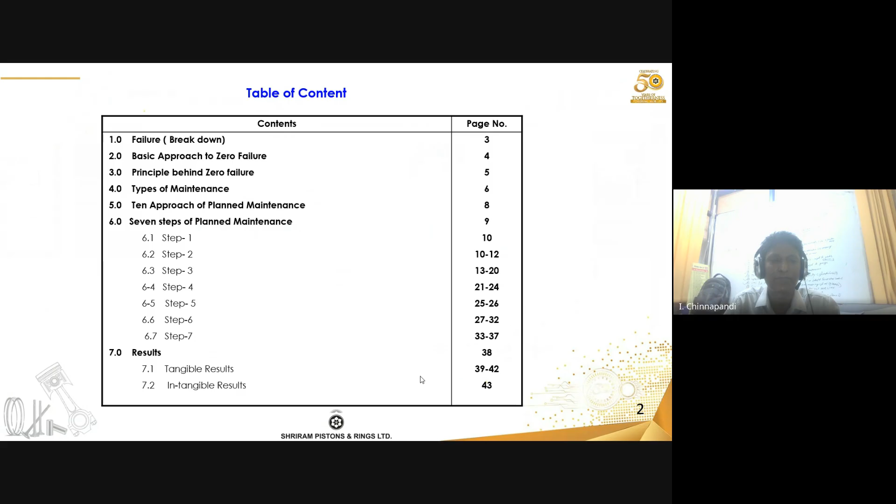Next. So this is what is failure. This definition is taken from the TPM. The TPM is a concept. It is designed and developed by JIPM.

It's called Japan Institute of Plant Maintenance. It's an institution in Japan. They define some principles and methods for maintenance, and they promoted all across the world. In India, most of the auto component manufacturing companies generally adopt these principles for TPM.

In South, in our state, we can say that there are many TVS companies. They got TPM like TVS Fasteners and many TVS Group, TVS Brakes India, and the industries, cement industries. So they adopt this methodology to improve, to reduce the breakdown and to improve their performance of the maintenance team.

The definition says failure is defined in Japanese Industrial Standard, JIS, as being any one of the following changes to the machine. One is losing any of its specified function. In simple language, if something is not performing, then becoming unable to achieve its specified performance. The machine is performing, but the rate of production is less.

For example, if you want to produce some component of these things. If we want to produce at a rate, for example per shift, if you want to produce some 5,000 components, we are manufacturing, but we are able to manufacture only 4,000 components, so we can say that the feed rate is less. And third point is becoming unable to produce products of a specified quality.

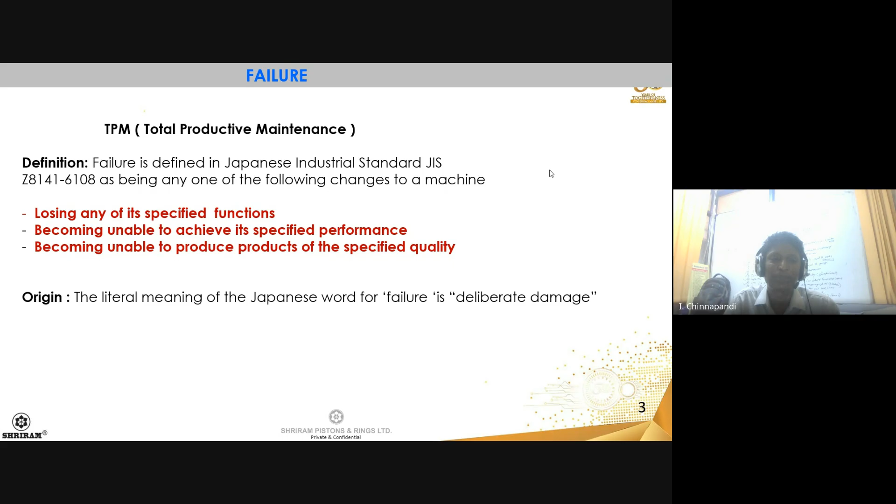The basic approach to zero failure.

Now manufacturing industries, especially the automobile industry, have to continuously operate machines 24/7, because in manufacturing and assembly lines, if it is a totally automated line, they will not stop for the equipment. It has to continuously run. So to continuously run that, what systems do we have to put in place so the equipment is in good condition and gives optimum performance?

The basic approach is equipment does not go wrong by itself. People made it go wrong, as we discussed earlier. By changing the way people think and act, equipment can be made completely failure free.

So it's a mindset. I have attended many trainings in Japan in different forms, and also at CII in India, Confederation of Indian Industry. They say we have to follow the system. If something is written, something has to be done, we have to follow that. That is all about maintenance. There is no shortcut, nothing more, nothing less. Just follow the systems and procedures.

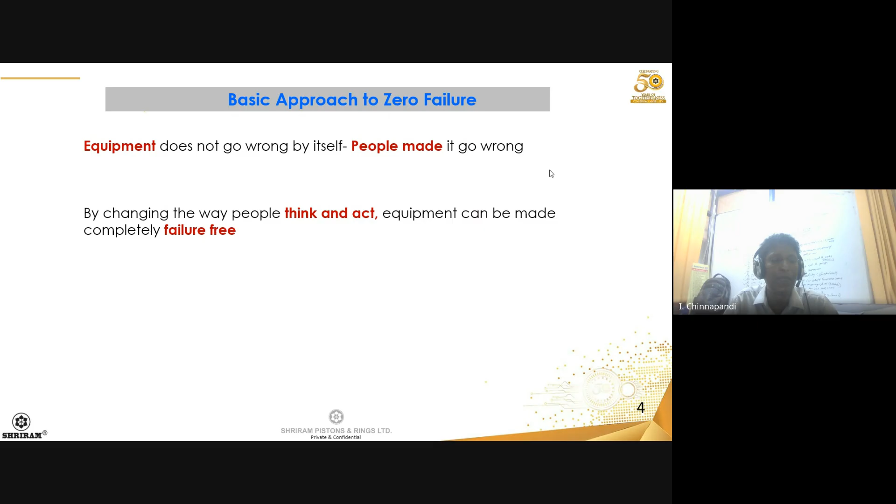Zero failure is all about the mindset. If we want to achieve it, yes, we can. Generally how we approach equipment is thinking one day it will fail - that kind of mindset we adopt generally. But we have to change the mindset. We have to believe that definitely we can achieve zero failure.

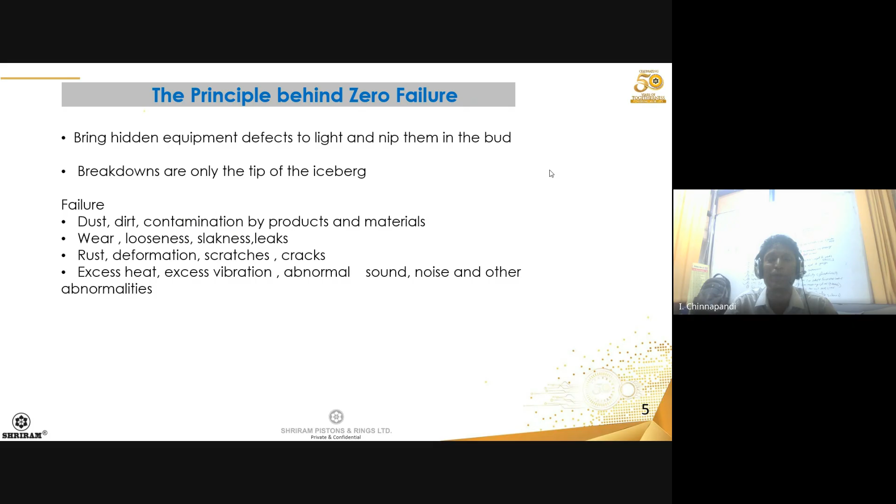So these are the types of maintenance. Maintenance starts with breakdown maintenance, corrective maintenance, preventive maintenance, predictive maintenance, condition-based maintenance, time-based maintenance, and maintenance prevention.

In the earlier age, in the 1960s or 50s, they used to do breakdown maintenance - whatever breakdown comes, they immediately fix it. Then it moved from breakdown maintenance to corrective maintenance. If a breakdown occurs, they fix it, then do some correction so it should not happen again.

Then it moved to preventive maintenance. Preventive maintenance means they made a schedule - yearly, monthly, quarterly. These are the checkpoints we have to do, these are the spare parts we have to replace. This maintenance is called preventive maintenance.

Then from that, they moved to predictive maintenance - that is the subject we are touching today. Predictive maintenance, the word itself says we predict something before it fails. It gives an indication something abnormal is happening, so at that time itself we can take some action. That is predictive maintenance, what we are discussing today.

And from predictive maintenance, we move to condition-based maintenance. Condition-based maintenance means we just see the condition of the equipment, take feedback of the condition, and accordingly do some correction. That's called condition-based maintenance.

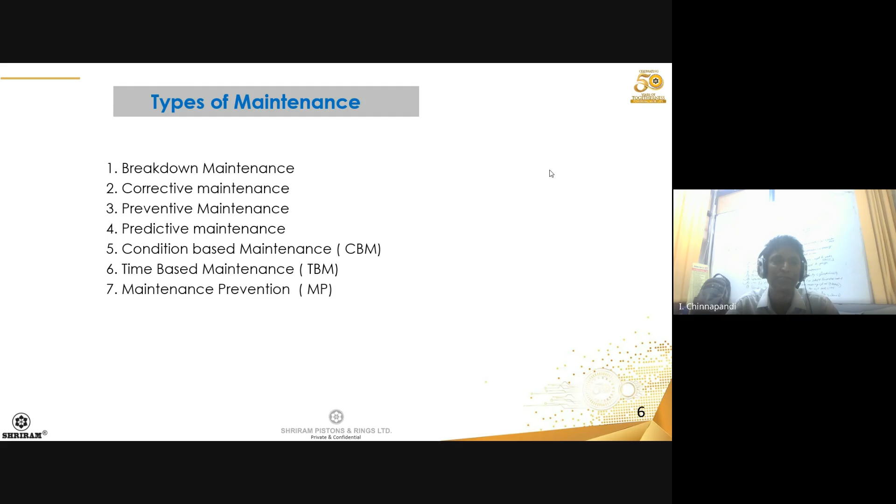So this is the basic role division. It means when there is a manufacturing team producing and operating the machine, and a maintenance team maintaining the machine, we have to define the role - what points the maintenance team will take care of, and what points the manufacturing team will take care of. This is the role definition basically.

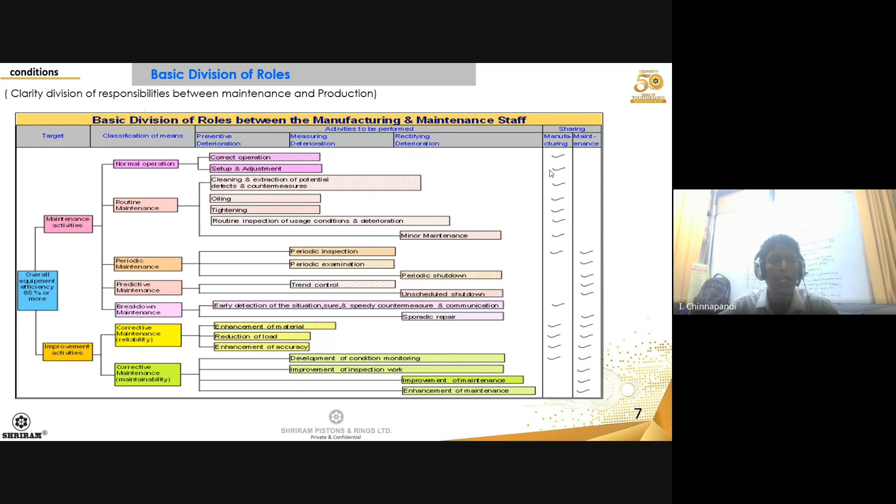Accordingly, the operating maintenance in-charge gives the check sheet to the production in-charge. These are the points they have to check in everyday operation, and they have to give feedback to the maintenance team. Next.

So this is the main crux of this content, whatever we are discussing - how a plant, an industry can go zero breakdown. This is the methodology which is defined and developed by Japan Institute of Plant Maintenance, in the name of TPM, that's called Total Productive Maintenance. This is a 10 approach of planned maintenance.

This 10 approach shows how we can increase the availability by increasing MTBF. MTBF means mean time between failure. For example, if equipment fails today, it can fail after 1 month also, after 6 months also, after 1 year also. So there is a mean time between failure.

And the other one is reduce MTTR. MTTR means mean time to repair. For example, in a shop floor, we are having 6,000 machines. There are 500 breakdowns, and it took 1,000 hours. So 1,000 divided by 500 is 2. So it means mean time to repair one breakdown is 2 hours. So this is how we can achieve that.

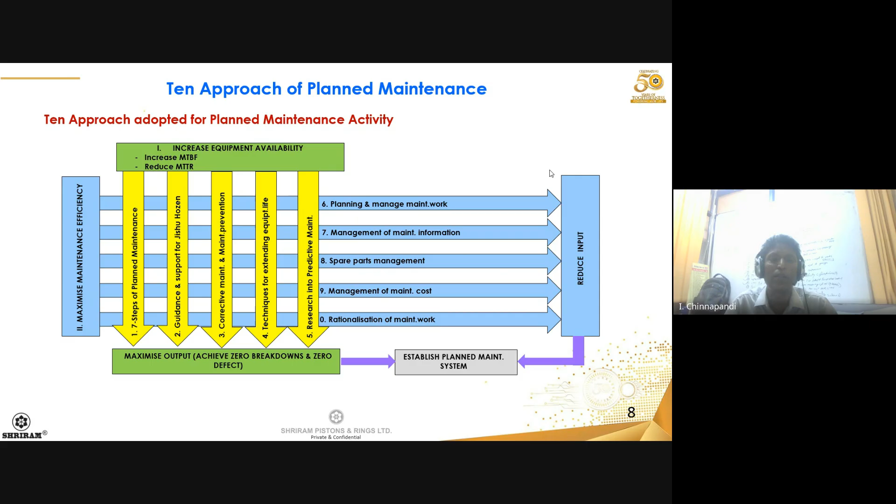These are the 5 things we have to do first. One is the 7 step of planned maintenance, then guidance and support for Jishu Hozen, then corrective maintenance and maintenance prevention, then different techniques adapted. Then the second point is maximize maintenance efficiency. For that also, these are the actions. So when you put together all these 10 actions, we can achieve a plant as a zero breakdown plant.

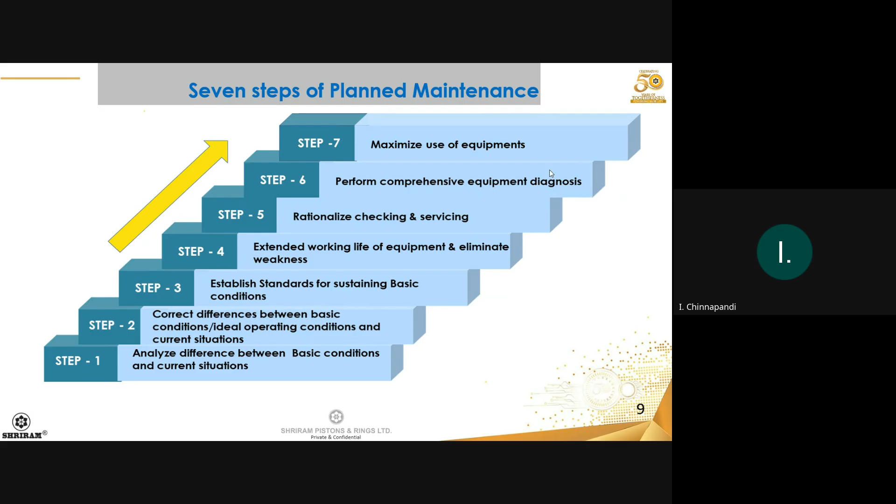Then rationalized checking and servicing means whatever checking and servicing we define, we have to religiously follow it. Then perform comprehensive equipment diagnosis - here comes the predictive maintenance. We have to install some equipment, tools and tackles on the equipment so that it can give us continuous 24/7 feedback, and accordingly we can take action. So if we take all these 6 steps, we can maximize the equipment life. So these are the 7 steps. Once we are adapting or following these 7 steps, we can achieve zero breakdown.

So this is the first step - what we discussed, analyze the difference between basic condition and current situation. So how it is on a shop floor, there are different machines, for example rough turning, locating seat, fine boring, grooving. There are different machines, so we just check the number of breakdowns per month. So we map it. Once we mapped it, we select which machine is contributing more. That is for the selection - for analyzing the difference between basic condition and the current situation.

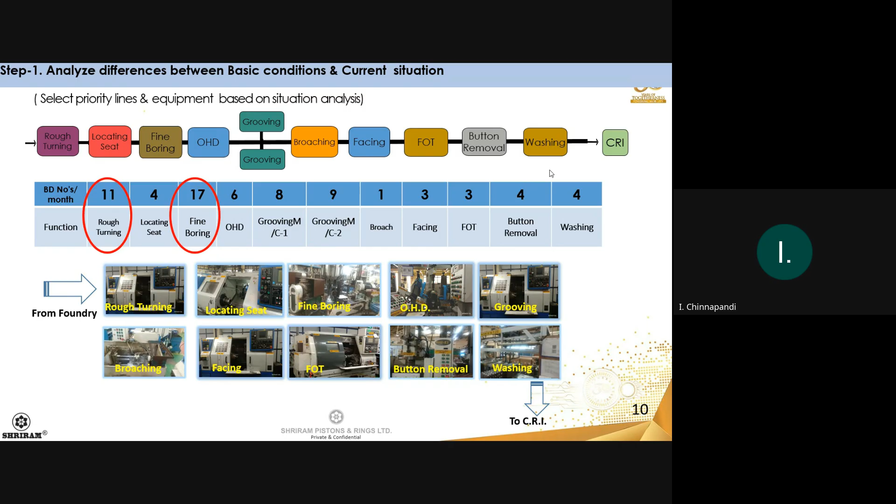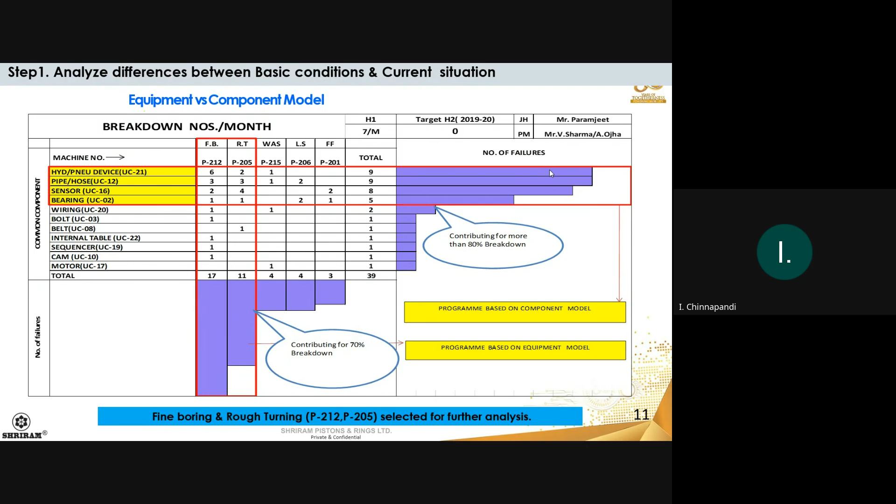And we put it in a 2D matrix. The 2D matrix shows which component has failed or which equipment is failing. So we take that - in a particular machine, is it the machine going again and again into breakdown, or is some particular component repeatedly going into breakdown? So this is the selection mode where you work on a particular machine or on a particular component. It's called the 2D matrix.

Then we do some why-why analysis, to understand why the failure is occurring. For example, if air pressure is low in a hydraulic pneumatic device, why? Booster not working. Why? Air leakage from the cylinder. And why is that failure occurring? The rod seal worn out or air pipe burst. That's the why, and finally we have to take countermeasures.

There are two countermeasures. One is physical countermeasure, another is management countermeasure. In physical countermeasure, we correct it - replacing parts or whatever needs to be done. In management countermeasure, we take action so the failure will not repeat again. So there are two types of countermeasures: one physical, another management.

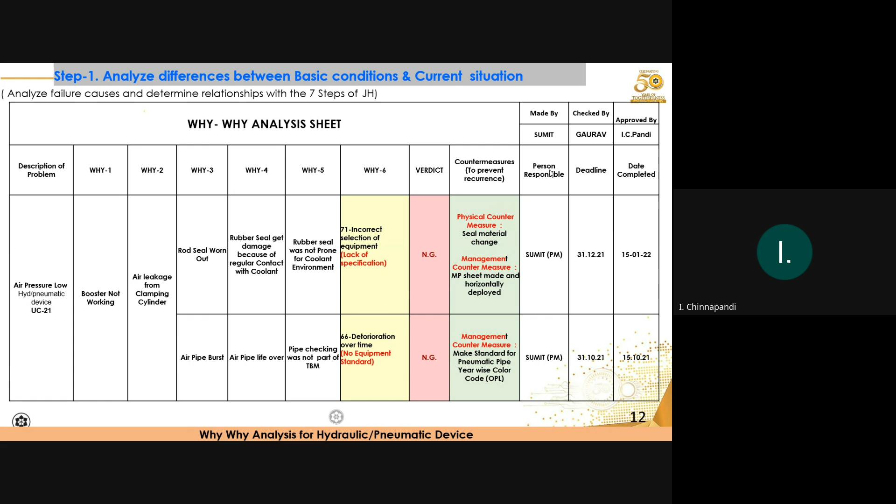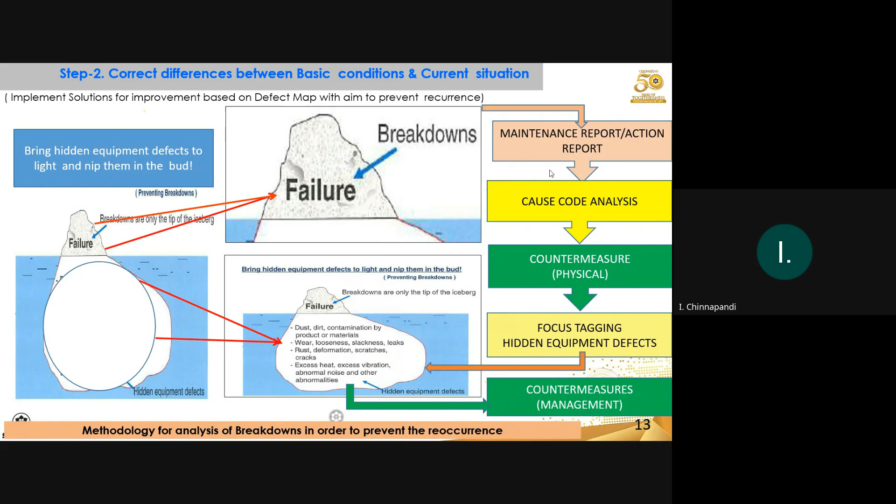Next, this is the correct basic conditions identification. Whatever failure occurs, it is the tip of the iceberg. Before it fails, there are hidden parts inside the equipment that can create or cause the equipment to fail.

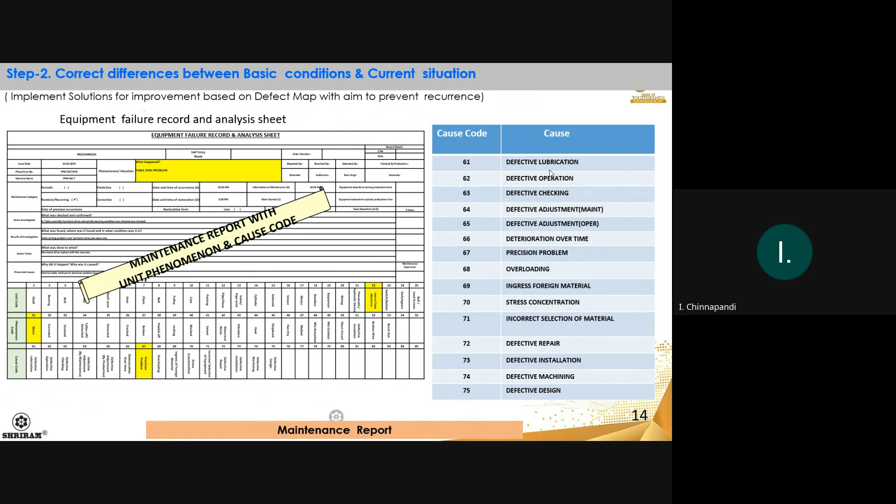Next, this is what we call the record sheet, the failure recording sheet. In this record sheet, we note what components went wrong - for example, defective lubrication, defective operation, defective checking, overloading, foreign particle, stress concentration, defective repair, defective installation. Whenever equipment fails, we fill this record. Once filled, we can identify the root cause, and with that root cause, we take analysis. This is the maintenance report showing how we identify and determine the cause of the failure.

Next, these are the things we use to identify the root cause - whether it's the primary cause or the secondary cause - and what the countermeasure is.

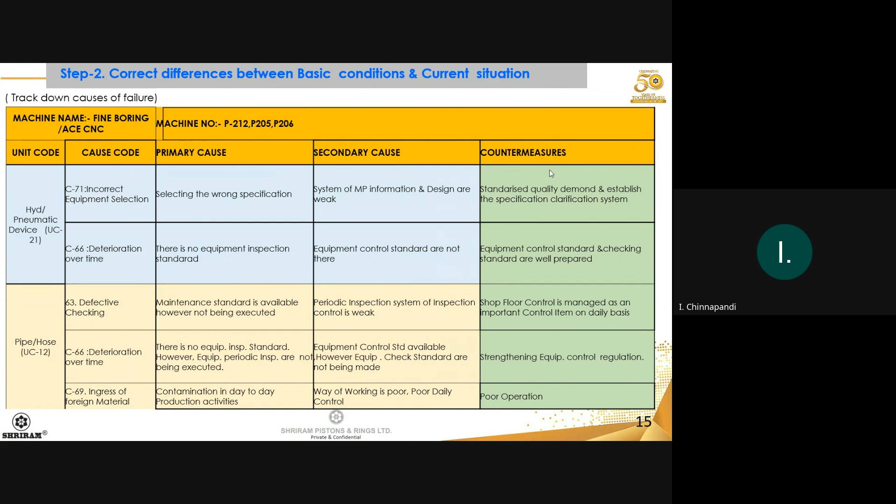For example, for a hydraulic or pneumatic device, the cause code could be incorrect equipment selection, selecting the wrong specification, deterioration over time, or no equipment inspection standard. When we find the primary cause, what could be the secondary cause? Equipment control standards are not there - if not maintained, if the check sheet is not there, the operator is not checking the function of individual components. It may be that the standard was not provided by the manufacturer, or the maintenance in-charge did not prepare the standard. The countermeasure: an equipment control standard has to be prepared, and accordingly we have to check it. So this is primary cause, secondary cause, and countermeasure.

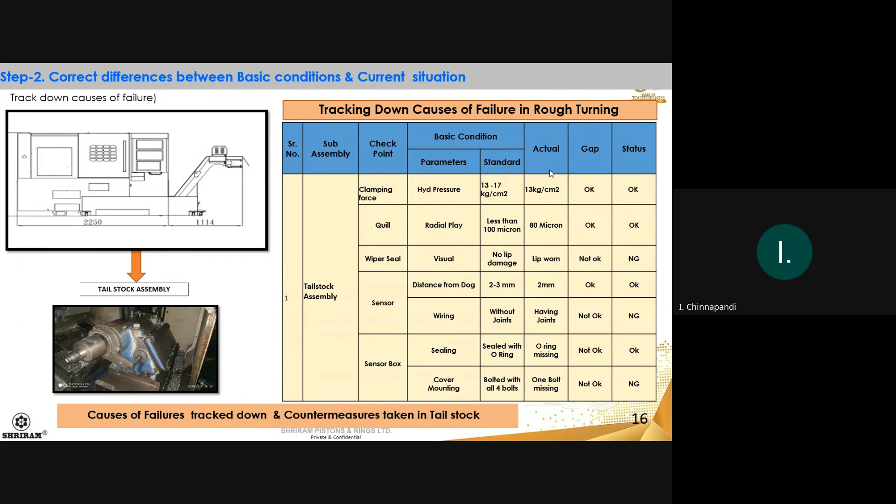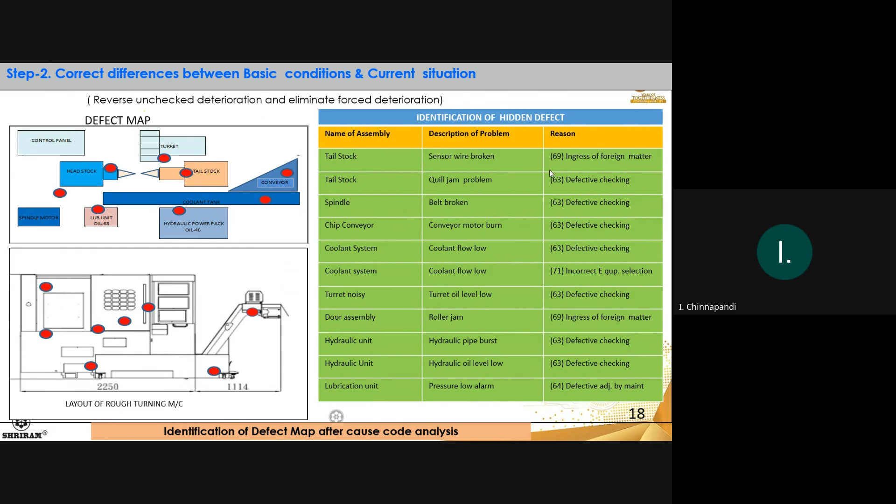And this is the mapping. Once we identify different parts of the whole equipment, we do mapping to understand which components have defects happening and in which areas - for example, tail stock, spindle, chip conveyor, coolant system, turret. The whole equipment is mapped to show where failures are happening, what the failures are, and what the code is. This mapping helps us take action.

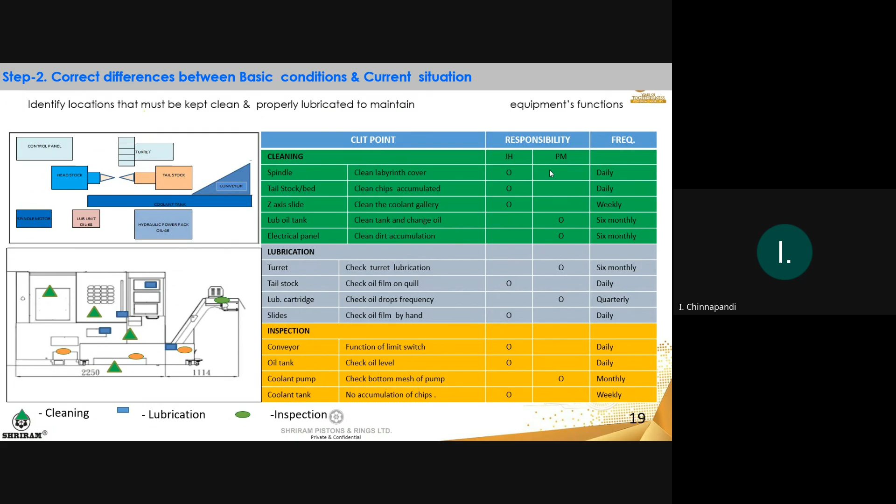Next, this shows the same things. Once we prepared that, we check who missed checking it - whether the responsibility is the maintenance team or the production team - and what frequency is defined for the checking point.

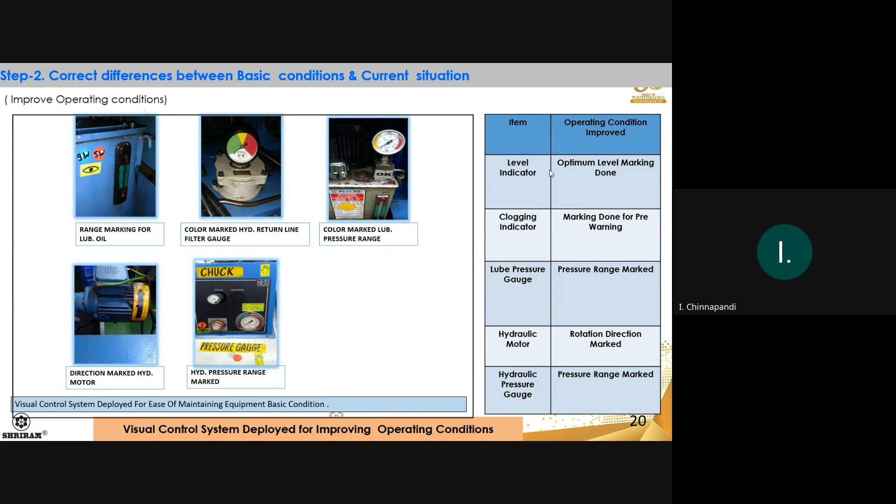Next, these are the indicators provided to the operator to check - whether the pressure gauge is green or red, whether the direction is okay or not, or whether the oil level indicator is within range. These are visual indicators provided to the operator so he can check and maintain the basic equipment condition.

Then comes step 3: establish a standard for sustaining basic condition. This is the standard for how we maintain it - we prepare an annual schedule, and per that schedule, standards are maintained. They check monthly; if it's okay, they mark it okay, and if not okay, they take action.

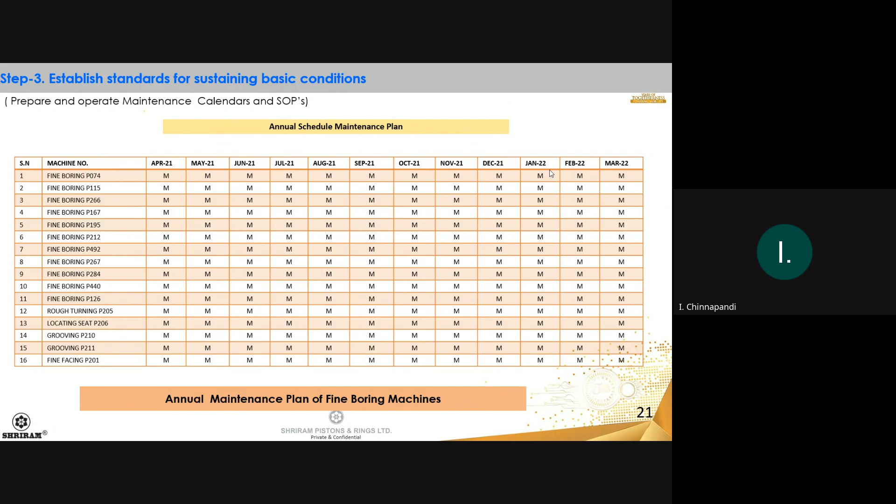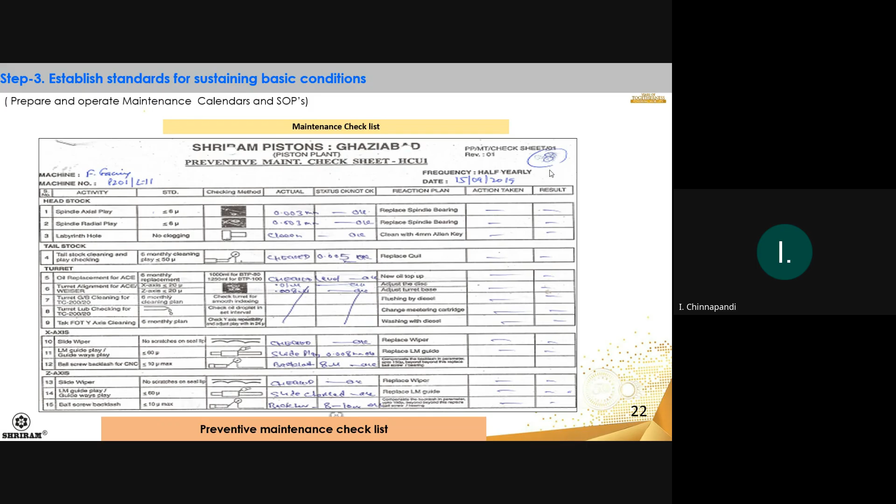And these are the standard sheets showing how they actually check it. For example, if the spindle axial play should be less than 6 microns, they check how much it actually is - axial play, radial play, parallelity, perpendicularity. These are the check sheets used during preventive maintenance.

And these are the checkpoints, standard checkpoints, which help the operator maintain the machines. Basically, it's the pressure, what should be the pressure, and what are the control parameters he has to maintain while operating the machine.

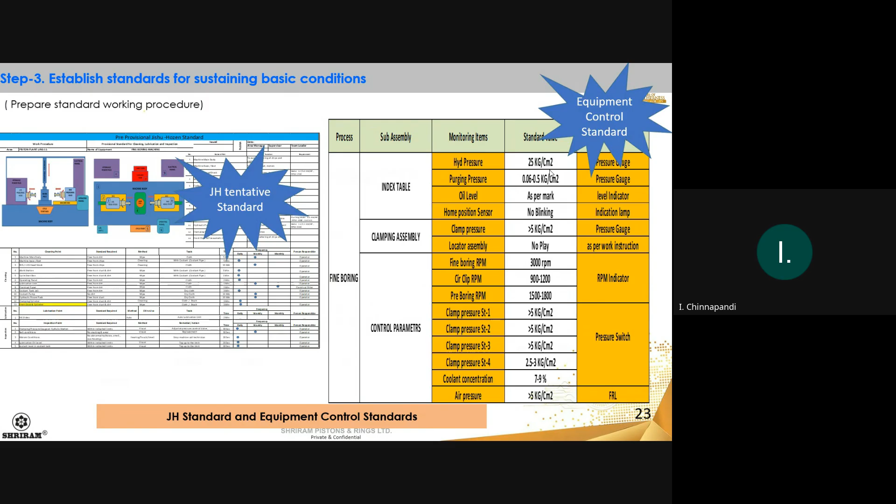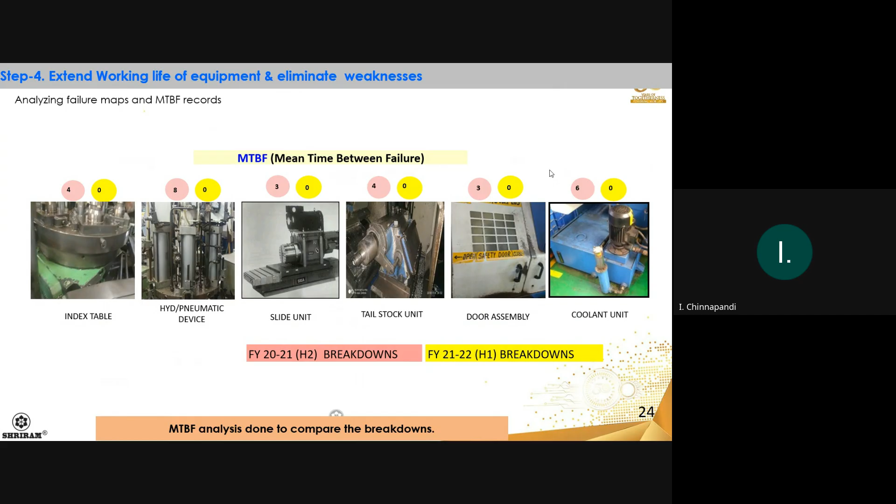To identify that, once the corrective action is taken, we use diagnostic techniques to predict failures. What are the diagnostic techniques? We will see in the subsequent slides.

This is the Kaizen sheet. Kaizen is a Japanese word, meaning improvement. Whenever we are doing some improvement, we make this Kaizen sheet and give it to the manufacturer so he can incorporate it into the new machines.

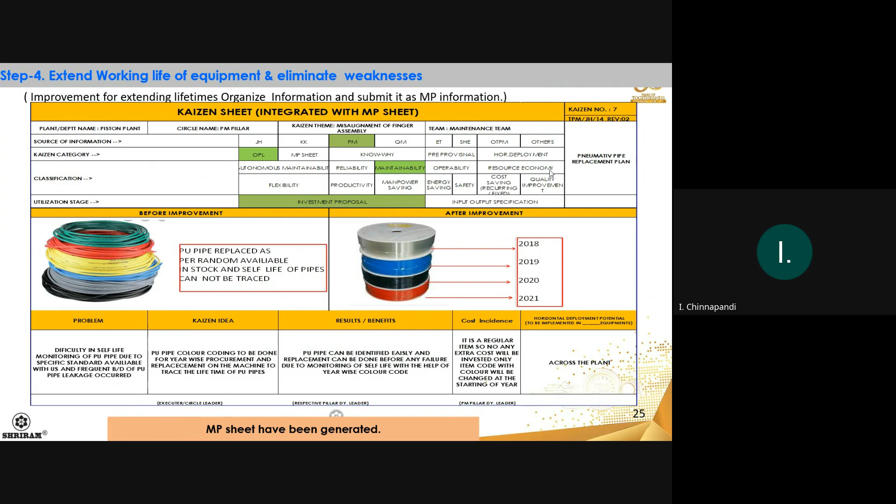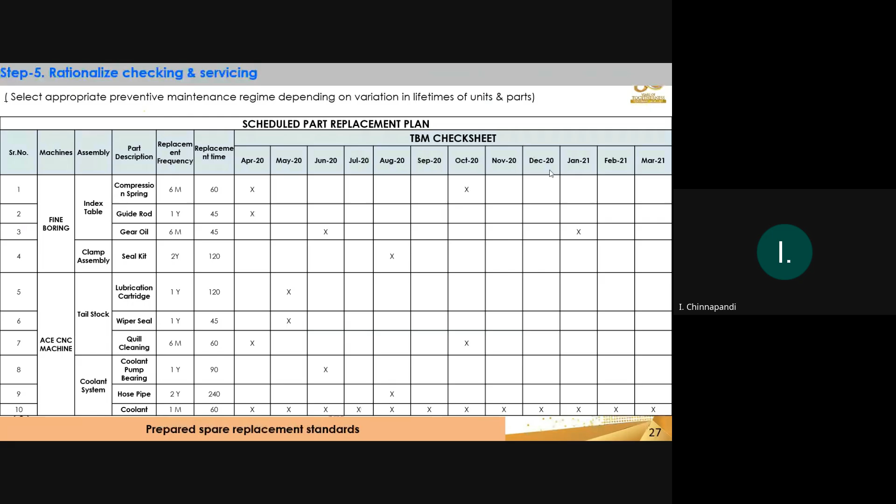That is the rationalized checking and servicing, and the purpose of rationalized checking and servicing.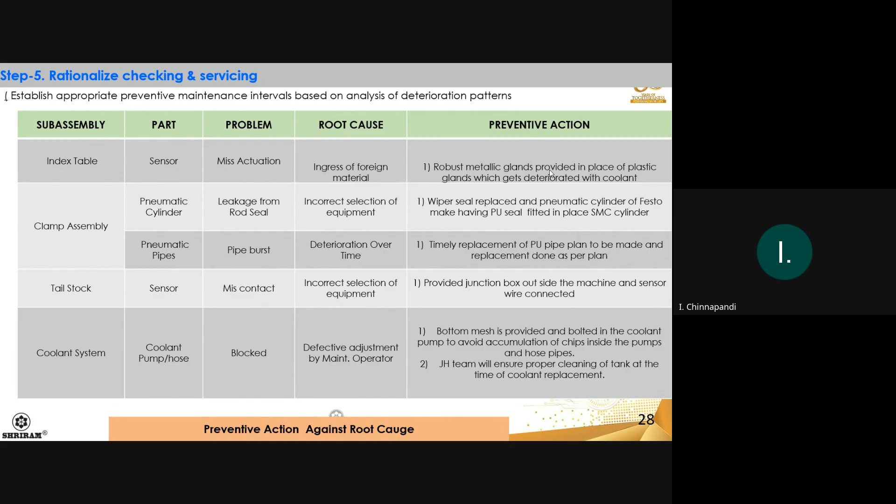I think this slide is repeating. Okay, next.

This is basically where predictive maintenance comes in. So far we've done the basic maintenance, progressed through breakdown maintenance: we mapped the machine, identified the equipment, identified the component, corrected it, made a standard, made a preventive maintenance plan, prepared a periodic replacement plan, and prepared a standard for checking. Everything is done, and now the equipment is working well.

Now these are the diagnostic tools we incorporate along the machine so it can give an indication before it fails — the vibration check instruments for the spindle. Most equipment runs with a spindle; in the automobile industry, 99% of machines are equipped with a spindle. Spindle means where the component is clamped and the tool machines it to get the desired output.

So in every spindle we put a sensor. This sensor gives a signal that we can view on our mobile or laptop. We feed it different color zones — green, yellow and red. If the spindle is running within the permissible vibration limit, it shows green, and if it goes beyond that level, it gives yellow. That's how the program works.

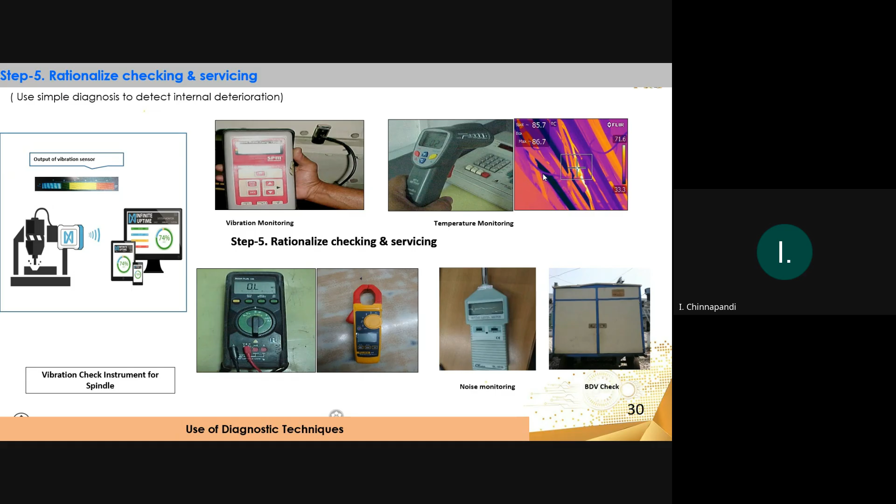Predictive maintenance is carried out depending upon some tools. Those tools give us input if any specified limit is crossed. From that point, we can take action to avoid the failure. So this is all about predictive maintenance and the predictive maintenance tools.

And these are the tools: vibration monitoring, spindles, bearing condition monitoring, spindles monitoring, compressors, motors, electrical bus bars, breakdown voltage of transformer oil, transformers, motor current and resistance, spindle and hydraulic motors, winding insulation resistance motors, corrosion rate, process water pipeline.

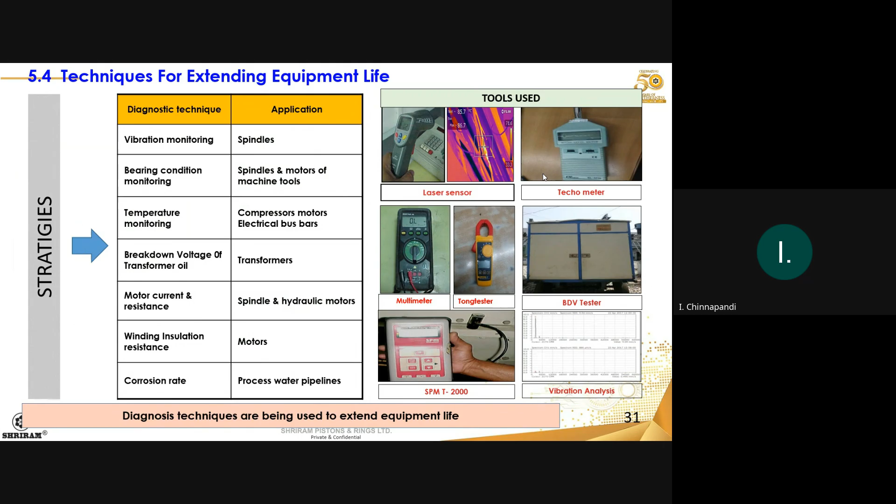This area is really the crux of predictive maintenance. These are the instruments which basically give you, online, the condition of the equipment. From that, we take action to avoid the failure. So this is all about predictive maintenance.

This is an example of how we can do that: green, yellow. It shows and gives the feedback like this.

And this is the same. We can define some components also as critical to quality. So for the equipment part, even though it is running, some of the quality parameters also we have to take into account there. We put some specific instruments to identify whether the quality is going beyond the limit or not.

For example, the vibration system gives the vibration of the spindle. But there is some other thing that gives the quality of the product, for example cylindricity or run-out or surface finish. So that also we can use as predictive maintenance tools.

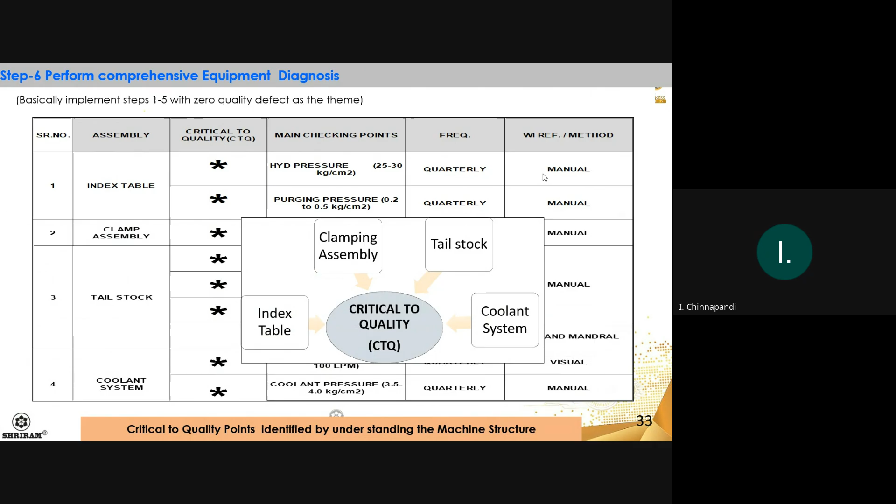And once we are doing that, where we can install the quality feedback instruments, we mark that point on the machine. There we install it, so that the feedback can be directly taken for the quality point of view.

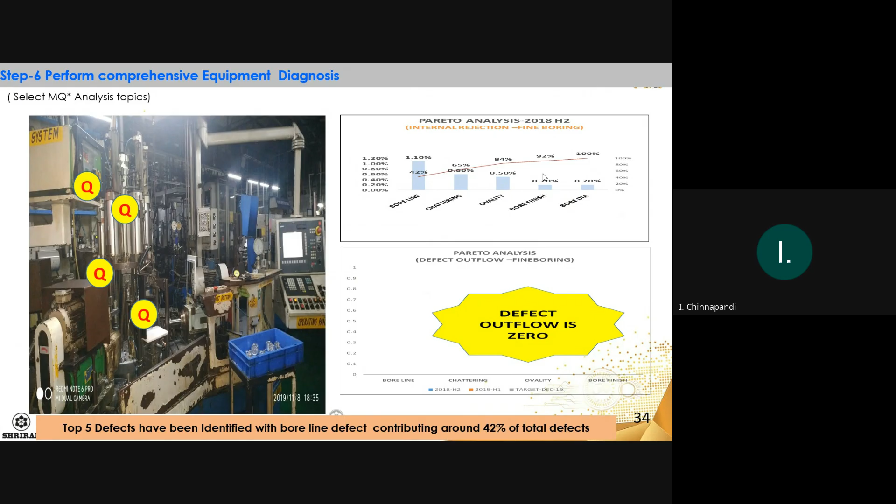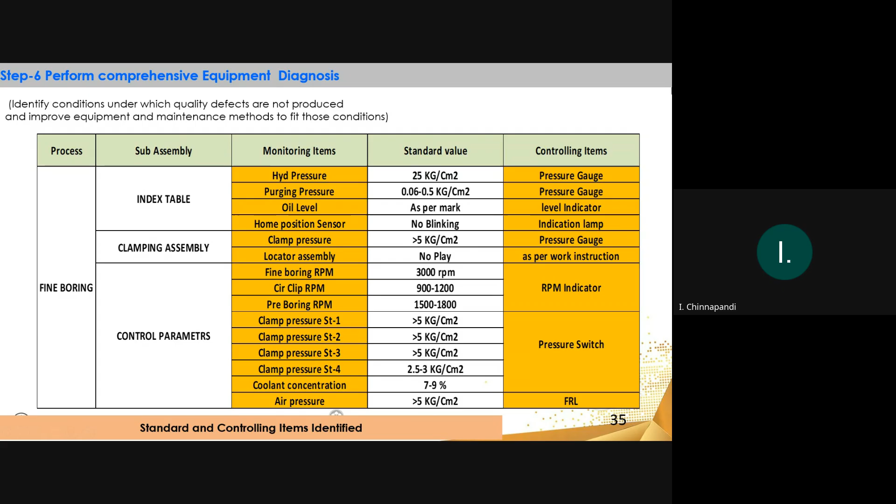And this is the parameter comprehensive checking. We discussed the pressure gauge, level indicator, pressure gauge again as per work instruction, RPM indicator, pressure switches. So these are the instruments which give you feedback: clamping pressure, set pressure, all these things.

And this is a standard wherever, for example RPM, whichever machine we are using, the clamping feed where we have to maintain, spindle lubrication where we have to maintain. This is the mapping for maintenance standard, basically.

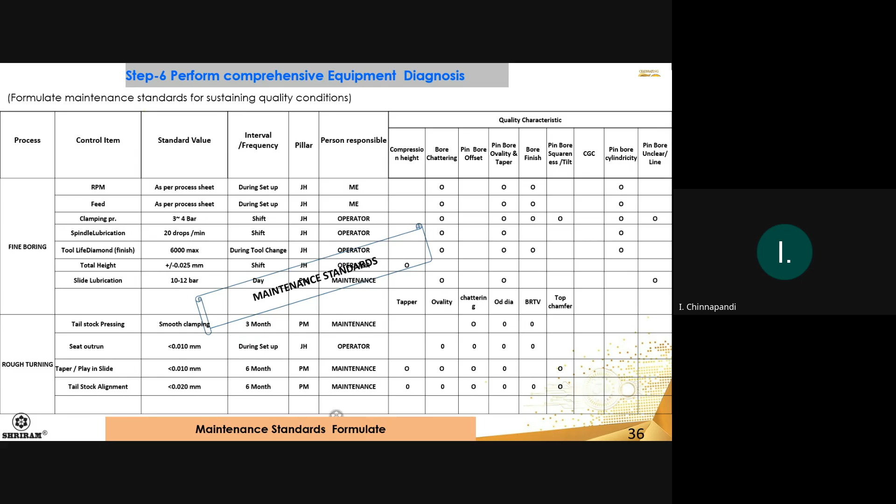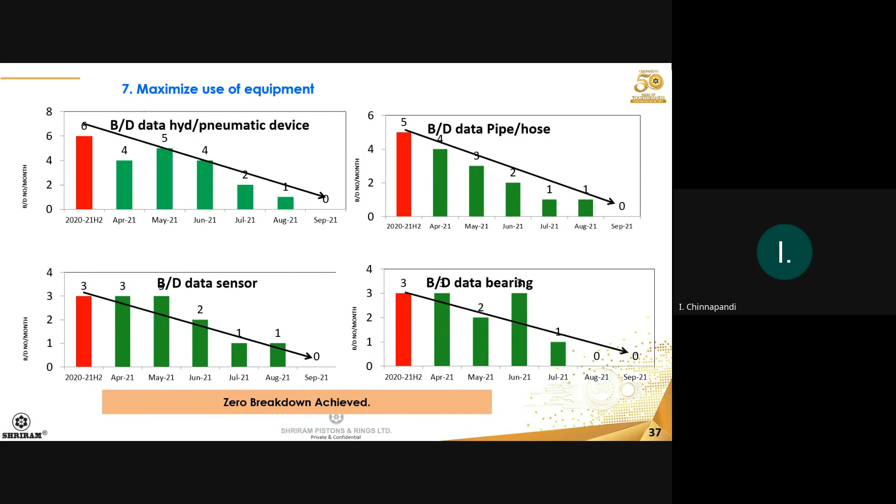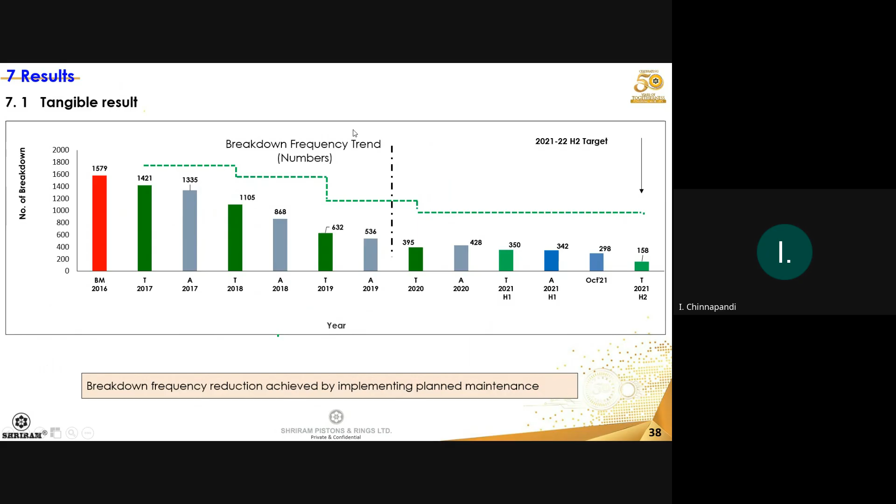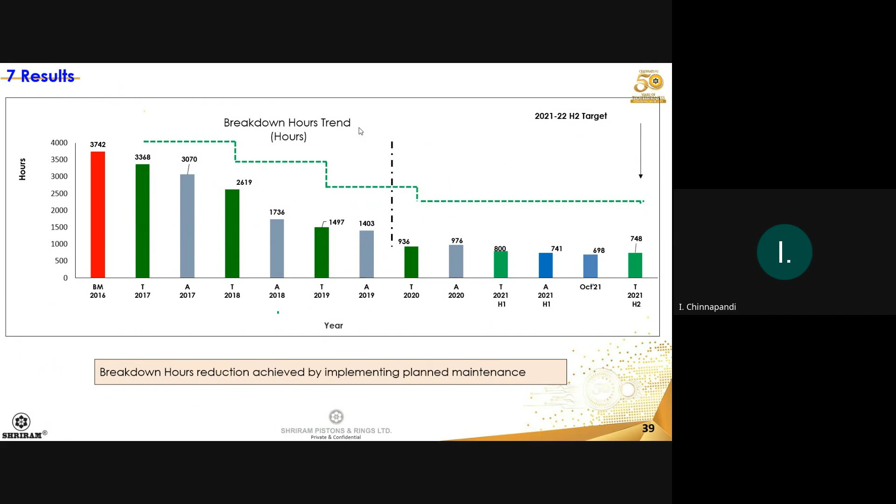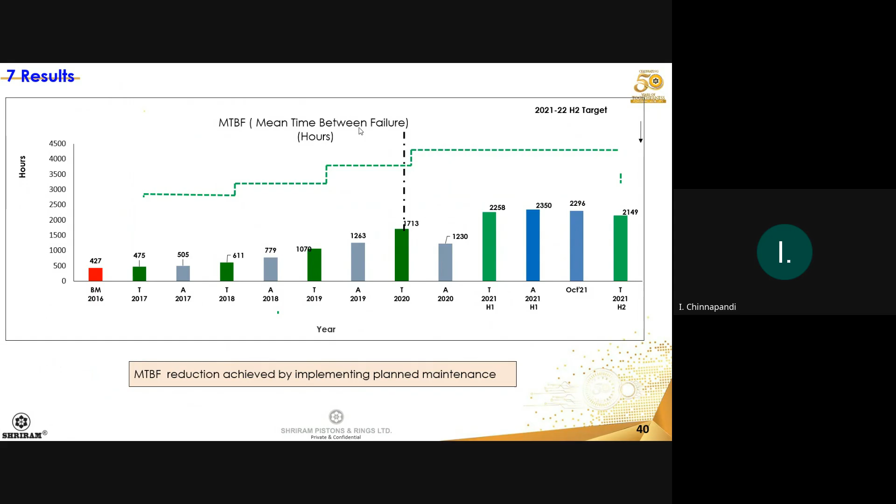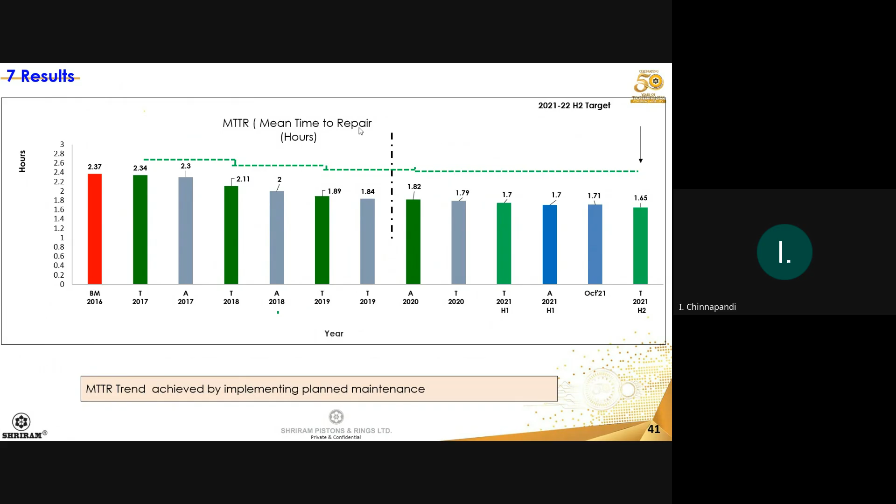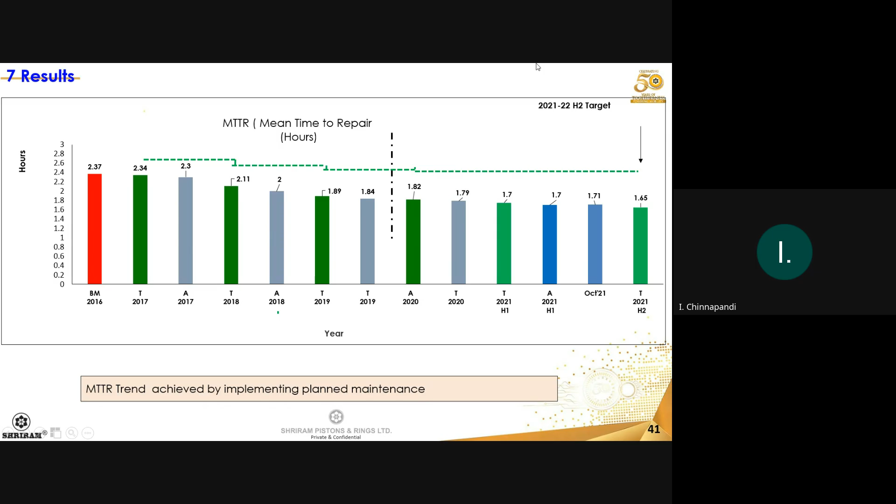This is the MTTR, mean time to repair, which means, as I said earlier, if the total breakdown hours in a month is 1,000 hours and there are 500 breakdowns in that month, then 1,000 divided by 500 equals 2. It means any breakdown took 2 hours to restore. That is the MTTR.

Thank you, this is all about the presentation for predictive maintenance, and generally how in an automobile industry like ours we maintain the equipment. It's basically we follow the automobile industry standard mostly in India, and they follow Japanese standards.

Because all the industry is there, Maruti Suzuki's collaboration, Honda Foundry, Honda. Even in my company, we have a collaboration with four collaborators, three from Japan. One is Honda Foundry Japan - you might have heard about Honda bike. We have a collaboration for piston manufacturing there. And Fuji Oozx, a company in Japan which supports engine valve manufacturing technically. Kolbenschmidt Germany supports piston manufacturing again, and for the ring component, Riken Corporation Japan. So these are the four principal collaborators.

The technology we are using comes from this support - we are trained overseas by our collaborators. Even myself, I went many times to Japan for maintenance training as well as equipment selection, and also to Germany, as I said while starting.

Generally we follow the system adopted by the Japanese, and especially for maintenance we follow the TPM guidelines, and there is a certification also. Like in quality they have a Deming Award, and for plant performance it's TPM - Total Productive Maintenance. That is the award. It's a 5 year journey, like a course, similar to a 4 year engineering course, but this is a 5 year course.

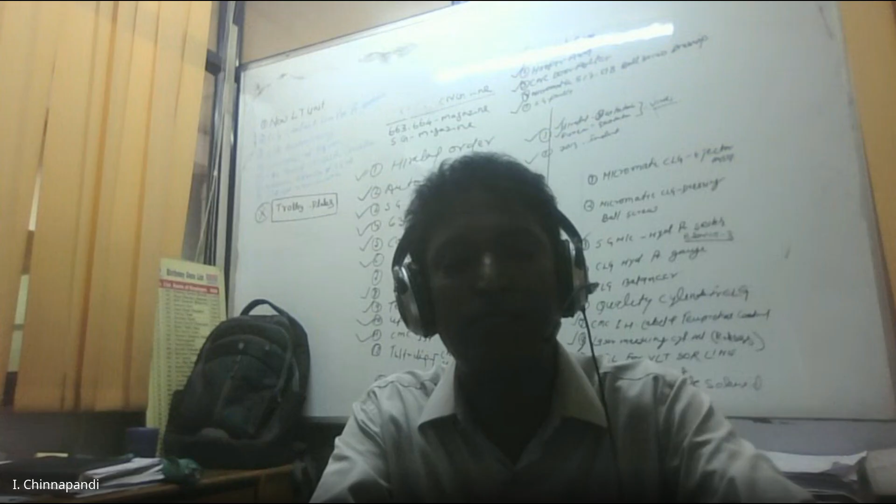Yeah, definitely. See, the failure mode analysis, FMEA. Once you identify the failure mode, you take some corrective action, then you take some preventive action. That is in the analysis. I said two things, two actions: one is a management action, and one is the corrective action.

What is the management action? Once everything's fixed, we analyze whether we can put some predictive tools, a diagnosis tool fixed to that, so that it can give a trigger, and it can give information before it fails. It depends upon that.

There may be a number of failures, and you can't go and take a predictive maintenance tool for all the failures, because it may not be cost effective. Why does failure happen? Failure can happen only when we missed something.

And the accident theory, see, it won't happen - it is deliberate damage. Coming to your point, whether we can use the failure mode as a predictive tool, yes, we can use it.

Once the failure mode happened, we took a corrective preventive action, and we can eliminate it. We can use a predictive tool, and during the manufacturing of the equipment itself, the manufacturer can also give you a predictive tool. However, there is a cost to it, and he will charge for it.